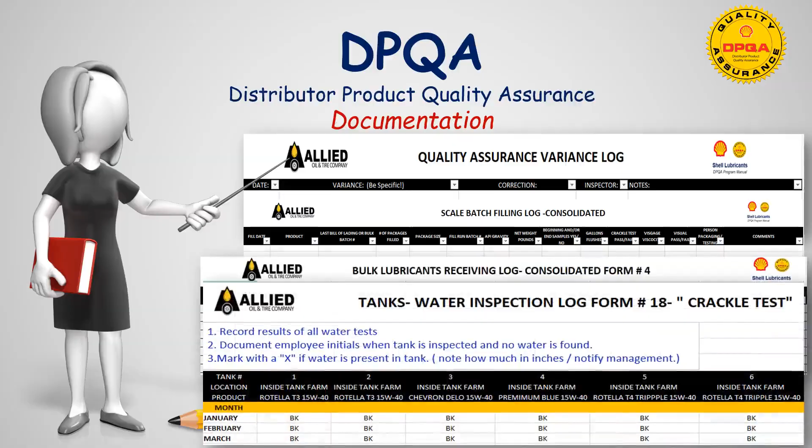Documentation is critical to maintaining a chain of custody. If we do not document, we're not able to trace product quality. Each step of the processes we follow requires documentation. We inspect products several times throughout our procedures to ensure product being received and or shipped is quality product. We will begin explaining the what, why, and how information relative to inspections next.

Standard number 2, water by crackle, is often called the crackle test. The crackle test is used to determine if oil is water-free, has water present, or has air entrapment. This is Mark Sabian Carter from our Wichita, Kansas branch. Today, Mark Sabian is going to demonstrate the proper way to do a water crackle test.

Mark Sabian has brought the electric skillet in, which is clean. There's no debris or old oil in the electric skillet. And Mark Sabian has his oil sample ready to go. And of course, he has on his PPE, which is, for this, gloves and safety glasses. And he also has the fire extinguisher handy and ready to go.

So step one is to put approximately 1 teaspoon of oil into a cool, not heated electric skillet. Good job. Now Mark Sabian will turn the electric skillet to 212 degrees.

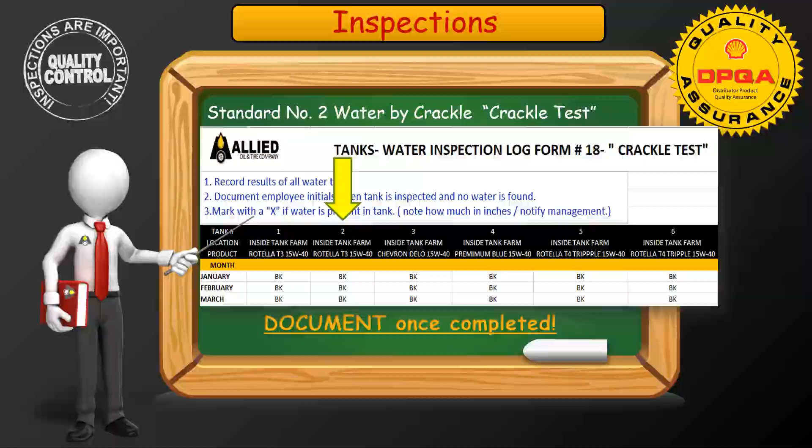Another product inspection we complete is the visual inspection test. This inspection is used more than all other inspections we complete. A few examples of when you complete visual inspections are receiving a bulk load of oil and when you are repackaging products from our bulk tanks to totes, drums, and pails. As time goes on and the more familiar you become with lubricants, you will easily identify distinct differences with products.

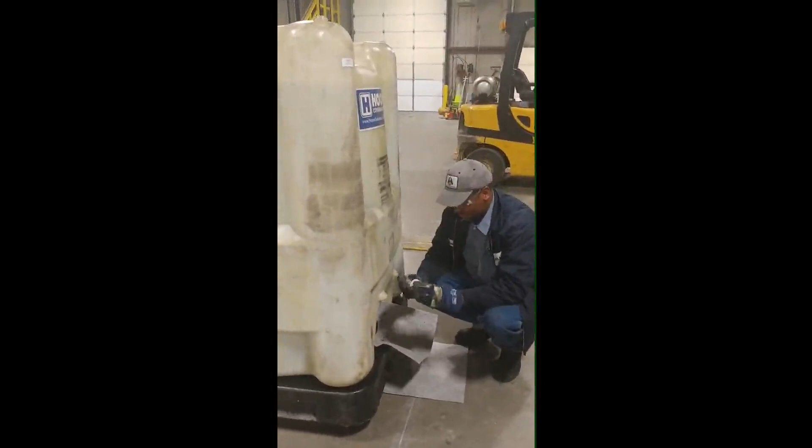The visual inspection is simple to complete. Okay, and now the proper way to complete a visual inspection test. You want to collect a sample in a clear plastic bottle. So the sample that Mark Sabian is pulling today is for a tote of Quaker State Advanced Durability 530 that is going to be loaded on a truck and go out for delivery tomorrow.

Okay. Now Mark Sabian has the retained sample pulled and he is securing the tote back up so we don't have an oil spill. Good job, Mark.

Now Mark Sabian is going to take the sample he just pulled versus the reference sample. The reference sample could be the last bulk receiving sample or a sample previously used. And remember, reference samples need to be changed out every 6 months at a minimum and should be stored away from UV light. So Mark Sabian is going to observe the color of the lubricant. It should match the reference sample.

And he's doing this by holding the sample up to a bright light and visually examining the sample at arm's length. So Mark Sabian is looking for the following. He is looking for water, free water in the sample, any kind of sediment, a hazy appearance, particles, any kind of suspended matter, or any other unusual characteristic. So how does that sample look? All is well.

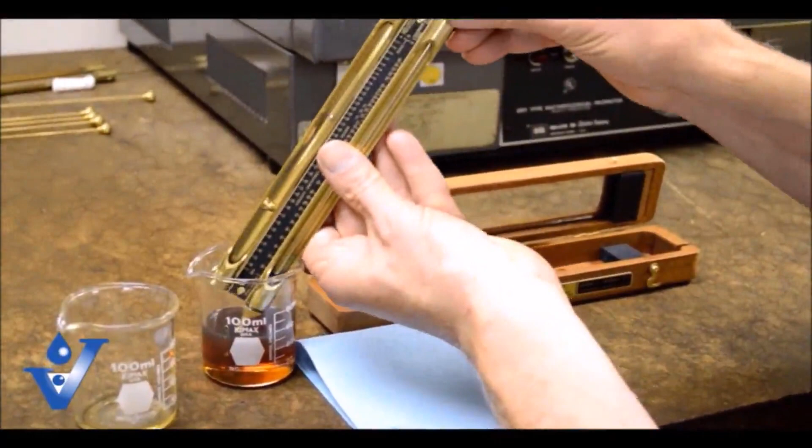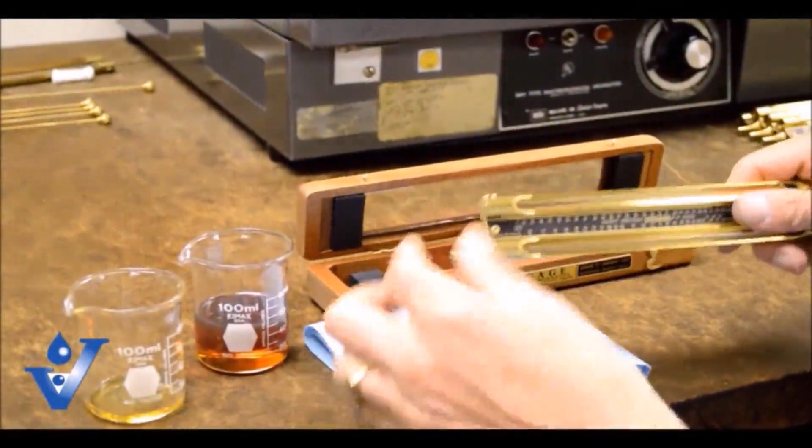First, purge the plunger tube to clean it, as residual oil from previous testings may contaminate your results. To purge the plunger tube, simply draw in a small amount of oil, then flush it out. Next, fill the plunger tube with oil, making sure to flush all air out of the sample. As you fill the tube, pull the plunger rod just past the zero so that the balls will line up.

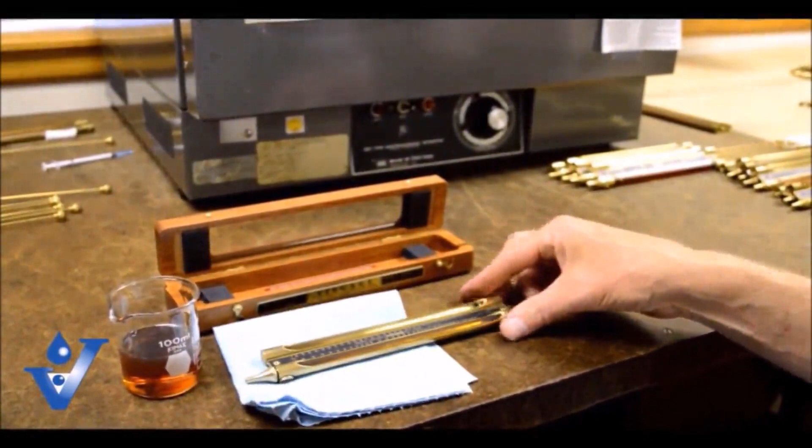Let the vis gauge sit until oil temperatures have equalized. Since viscosity changes with temperature, the reference oil and the oil you are testing need to be the same temperature. To run the test, line the balls up with zero. Hold the ends of the scale and quickly bring the instrument to a 35-degree angle, then return to level so that the leading ball stops at the leftmost line. The oil's viscosity can be read from the scale where the slower ball has stopped.

Once viscosity is obtained, you will document the results on form number 7. You will simply document the date, product, results, your name as the tester, and any comments. Kenny at our Kansas City location completed these tests. You notice the product tested was AW46 and the viscosity result was a 46.48. This is a passing result.

Taking samples is one of the most important aspects of DPQA and your position. We take oil samples when bulk tank loads arrive at the branches, when we repackage products from bulk to packaged goods, fill our own bulk tankers or bumblebees, transferring bulk product to other locations, and prior to dispatching bulk oil to our customers.

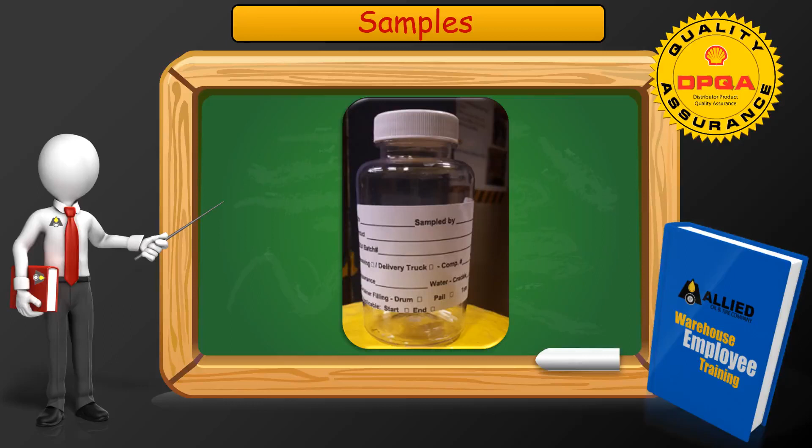The shop is most likely going to give us a call and ask for our assistance with oil traceability. At this point, we would go back to our oil retained samples to confirm the correct oil was received by Allied originally, and then follow the steps for repackaging, etc. We retain all oil samples for 1 year. Let's dig into the details of the standard number 10, taking samples bulk receiving.

The equipment you will need for taking samples is safety glasses or goggles, gloves, transparent 4-ounce sample bottles. Always keep sample bottles sealed except when the sample is being taken. Labels for the sample bottles, a marking pen, and tools for opening the valves as needed.

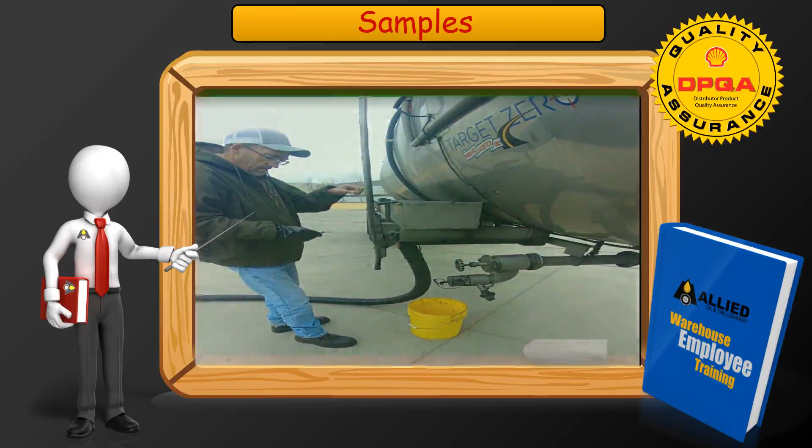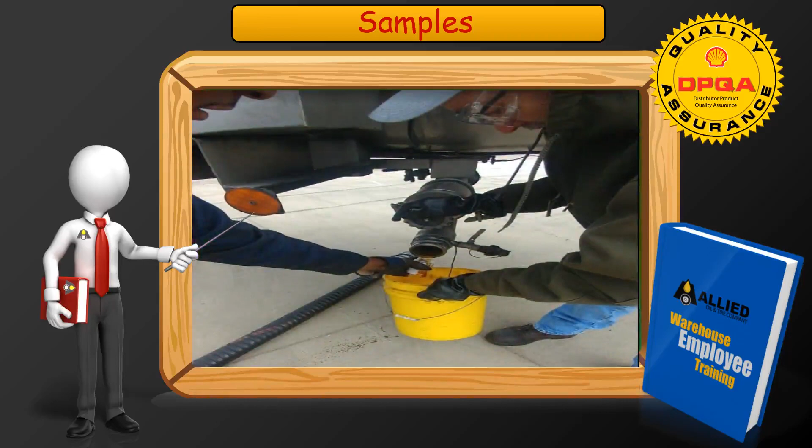To pull a sample from a bulk tanker, you will need to open the belly or safety valve on the trailer slowly and carefully for approximately 10 seconds, then close the valve. This will charge your line. Open the valve partially and drain approximately 1 gallon of oil into the flush container. This will purge the valve and the line. Keep the valve open slightly and fill the 4-ounce sample bottle, then close the valve.

Put the lid on the sample container and conduct a visual inspection test. Compare sample to reference sample for color, clarity, and overall variances. If the product is still hazy or milky, or the viscosity seems off, or if the product does not appear normal, drain additional product from the line and resample the product. Repeat as necessary. If the sample still appears cloudy or hazy, run a crackle test. If the viscosity seems off, run a viscosity test using a vis gauge.

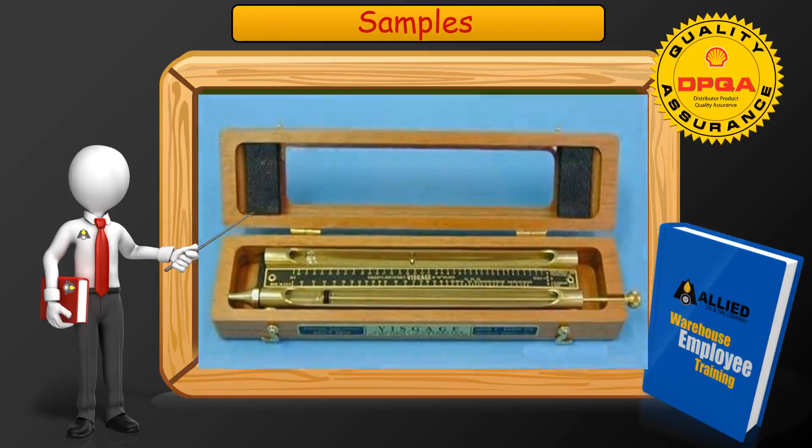If 10 gallons of product is purged and the sample still appears abnormal, notify your supervisor and or the district's operations manager. If the sample does come out normal, get a new sample bottle and catch the sample that will be kept for this compartment. Label the sample using an Allied approved sample label. The information on the sample label must be recorded into the bulk lubricants receiving log.

Put the retained sample in the proper place in the retained cabinet. Return all equipment to the proper locations and proceed with the unloading as per your bulk receiving procedures. All flush oil must be documented on the bulk lubricants receiving log. We also take samples when filling containers. Let's cover tote filling samples first.

Today we're going to be taking a sample. We just filled this tote, Cat 30, to make sure there's not any contaminants or any water or moisture. Filling out the label, you'll put the date, which will be the 30th. We took the sample. You also want to put the product, which would be Cat SE 30. You also want to put the batch label, which would be on the side here of the current batch label. Once you have the label filled out, pull the cap off the bottle.

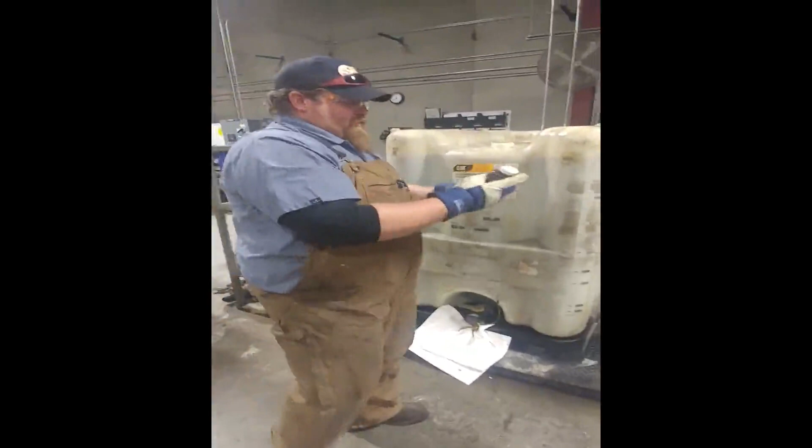Put this cap back on the spout. And you want to visually look for any color differences, any contaminants, moisture. If you're filling more than one tote, you want to take a sample from the first tote before you fill the others.

Thank you, Jordan. All branches have the batch code identified on totes. Jordan pointed to the upper right-hand corner during this video to show the location of the batch number. Your branch may not put the batch number in this exact location. Some branches have the batch number on the label itself, and some have the batch number on a tag that shows the tote and batch number in one location. Your supervisor will show you the location of batch codes on containers during your hands-on training.

A few items to remember when you are filling totes. If the totes are product dedicated, you are permitted to take retained samples from the first and last tote filled versus taking a sample from each tote you fill with product. A product dedicated tote means that one specific product will always be loaded into the tote.

If the totes are product group dedicated, then you must take a retained sample from every tote filled. Product group dedicated tote means that totes are identified as passenger car motor oil, PCMO, or heavy duty motor oil, HDMO, or perhaps antifreeze or industrial lubricants, not a specific product. Once you have determined the type of totes, product dedicated or product group dedicated, you can proceed with obtaining samples.

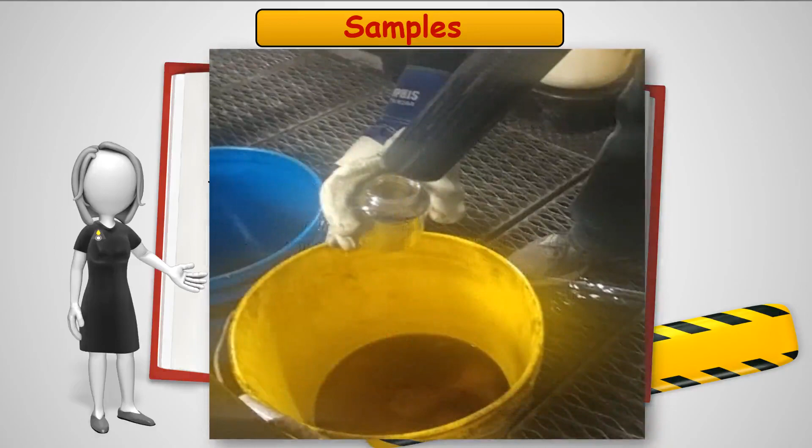For drum and keg filling retained samples, you will pull the first sample directly from the nozzle after sufficient draining or flushing. All other steps to pulling samples are the same as we previously covered. For pail retained samples, if you are filling pails from a tote, pull the retained sample from the tote. If you are filling pails from a bulk tank, pull the retained sample from the fill nozzle after enough draining or flushing has occurred. Documentation for all will occur on the scale batch filling log.

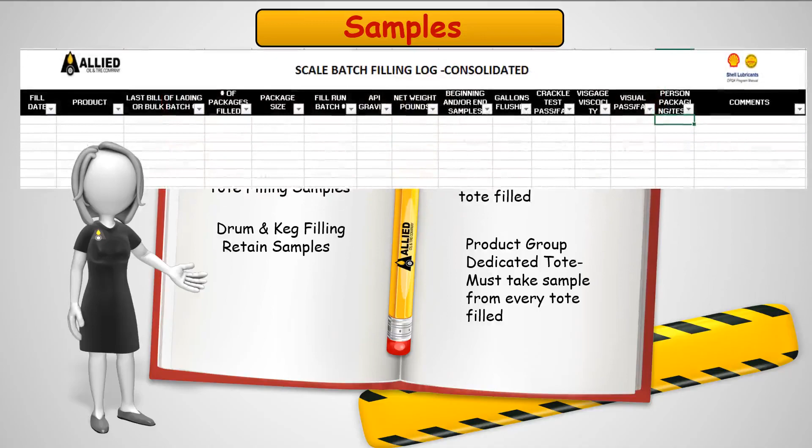Let's cover tote inspections. All totes must be thoroughly inspected inside and outside immediately prior to filling with product. This inspection is one of the key elements in maintaining product quality. Let's listen to Jordan as he walks us through a tote inspection. This is how to do an inspection on a tote to make sure it's clean and ready for product.

First step, you look at the overall condition of the tote. You look at the cage, make sure it's not dented or damaged. Is it in good condition? You look at the outer condition of the tote. You're checking for any cracks or damage. Then you want to look at the base of the tote, make sure it is not damaged.

You also want to look at the labels, make sure the labels are what your product is going to be in there. If not, then you need to make sure that all the labels are taken off so it is ready for another product. You want to check the spout, make sure it is closed, has a cap on it, make sure it is tight. So you want to look at the overall condition, make sure it is in good shape.

Then you want to look at the top of the tote, make sure it is clean. Any paint or rust that's on top of these, you need to make sure it's clean before you put any product. You want to make sure it is ready for inspection of the inside. When you do that, you also want to look at the cap, make sure it's in good shape, not damaged or cracked. Then you also want to look at the inside. Use a mirror with a light.

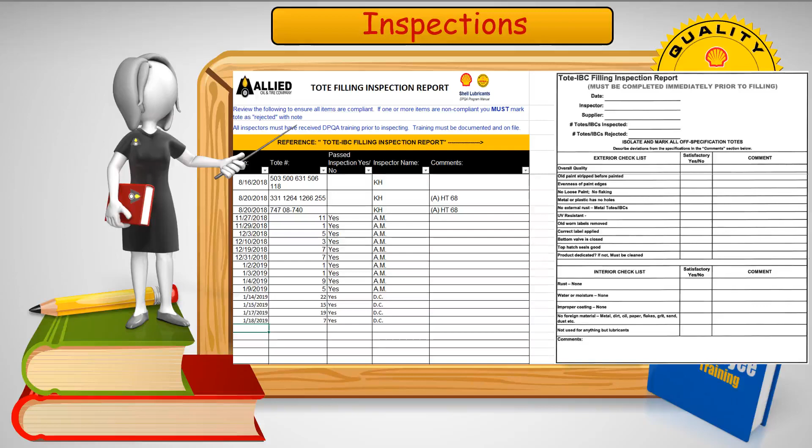Most totes that we fill are kept in the same product group, PCMO to PCMO or HDMO to HDMO, for example. If we do need to fill a tote that is not in the same product group, the tote must be cleaned or flushed and re-inspected prior to fill. Tote inspections must be documented on the electronic tote filling inspection report. You will document the date you inspect, the tote number, if the tote passed inspection, so pass or fail, your name or initials, and any comments. If a tote is rejected, you should document why it was rejected.

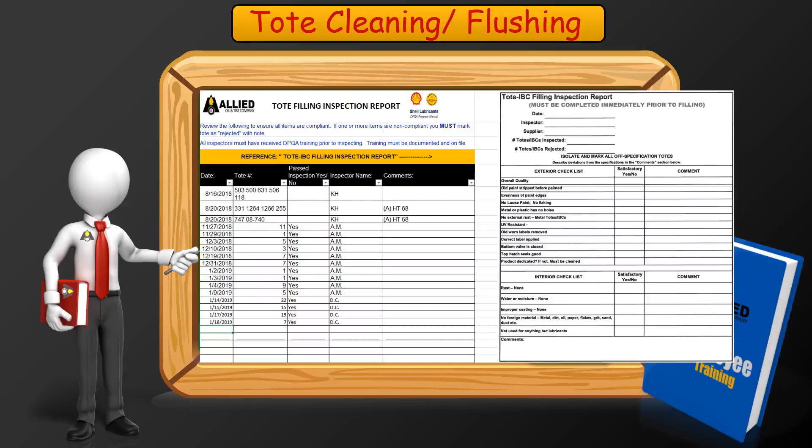As previously mentioned, all containers must be thoroughly inspected inside and outside immediately prior to filling with products. Let's watch a short video of the proper way to inspect drums prior to filling. Alright, so today I'm going to be teaching you how to inspect this drum for quality and for standards outlined in the DPQA manual, okay?

This form is what you'll use to fill out while you're doing your inspection, okay? If you can see as I'm going through this, all of this also mirrors what we're going to be going over in this video. So, first of all, new or reconditioned drums have to be inspected before they're filled, and then we fill out the document on this form.

Alright, so the first thing you're going to be doing is looking at the outside of the drum. You're going to be looking for overall quality. You want to make sure there's no dents, big dents, holes, anything like that. You're going to have to check the bottom of the drum too, because that has happened before. We filled drums and found out there's a hole in the bottom. So you need to check the bottom of the drum as well. Okay.

Other things you're looking for, as you can see, the paint quality. You want to make sure you have the right color of drum for the product you're going to be doing. The evenness of the edges of the paint. Make sure there's no run, no flaking or loose paint. And then, like I said, the paint color.

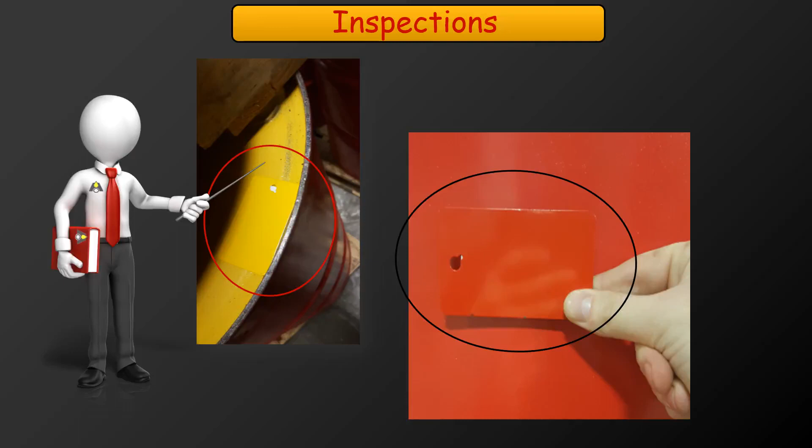So to recap, check the overall quality of the drum for paint quality and that brand colors match. Make sure old labels are removed, no corrugated drums permitted, that there are no excessive dings or dents present, and that there's no internal rust, water, or foreign materials. And always check the gasket condition as well.

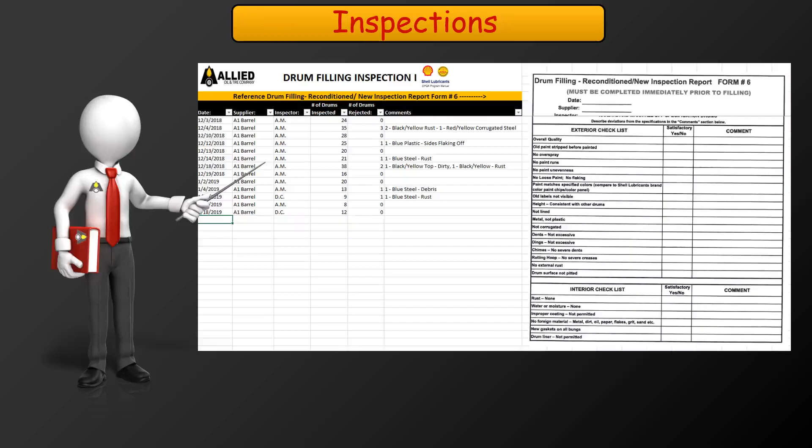All drum inspections must be documented. Here is an example of how the folks at our Kansas City branch document inspections. Keg inspections are identical to drum inspections. Every pail must be inspected prior to filling. Confirm that they are new. We do not permit reusing or refilling them.

Confirm that the pails are the correct color for the brand. You will see a color coding chart near the fill area at your branch. Verify that there is no water or moisture on the interior or exterior and that the pail has no improper coatings. No foreign material, such as dust, should be present. You will document the visual pail inspection on the scale batch filling log.

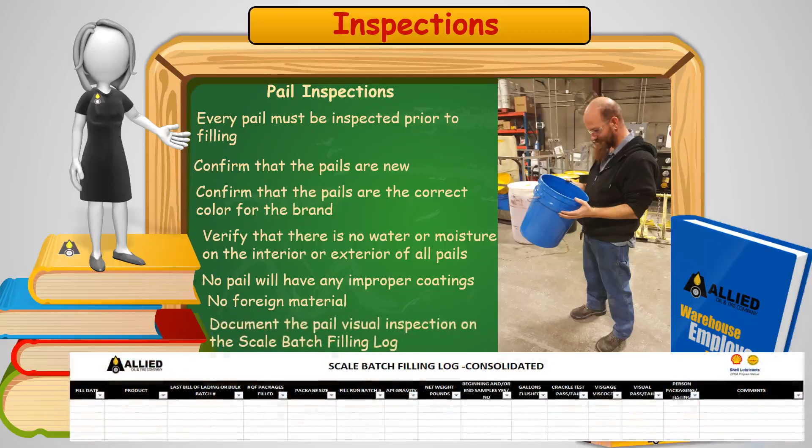We know that there is a lot of information that we are sharing today. Never be afraid to ask questions, and remember that all procedures are posted at your branch. Your next step will be hands-on training with a mentor at your location. This concludes DPQA Training Part 1. Please complete the short quiz.